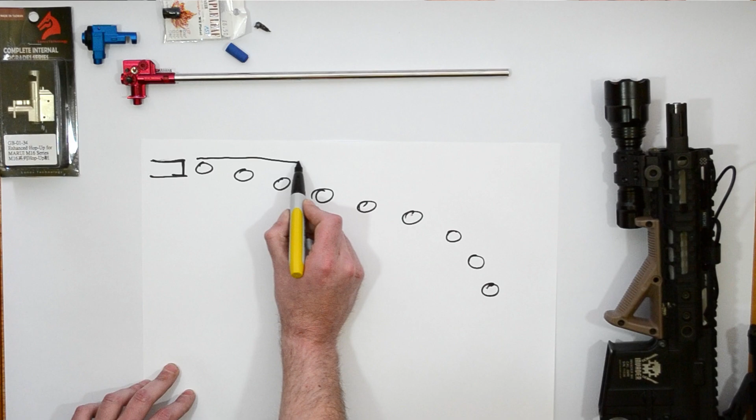If there was no hop-up, the BBs are just being propelled by air in this direction. What would happen is our BBs would come out, and then almost immediately they would start to dip, and dip, and dip - perhaps not as extreme as this, but as they go along they'd run out of momentum and fall to the ground. So you can imagine this would end up with a curve that starts to dip slowly, and then as it runs out of energy, down it comes.

Which isn't ideal, and more importantly, this distance here could be as little as 20 feet. Airsoft guns without a hop-up effect shoot very little distance at all.

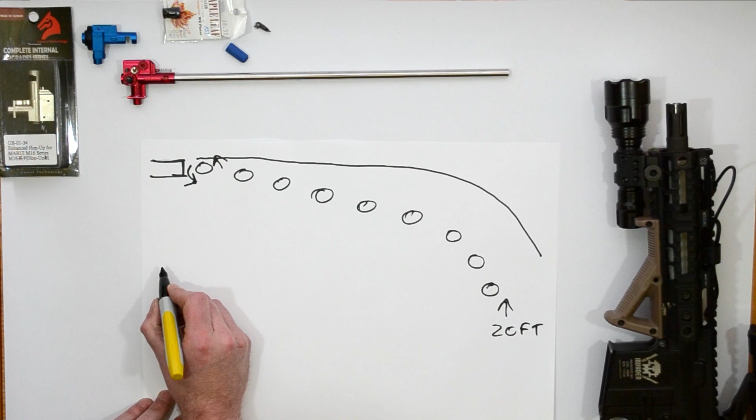So what a hop-up does is apply backspin to the BB as it's coming out of the barrel. So instead of coming naturally out of here, when they come out they've got momentum like this. This means that instead of just falling immediately, they're actually spinning against the force of gravity, so the trajectory ends up looking much more like this.

It looks similar, a bit straighter here, you'll notice. The main difference will be this will now be 75 feet or 100 feet. So they can make an enormous difference - they're hugely important to how far your gun is going to shoot, and because of this, adjusting them can make a massive difference.

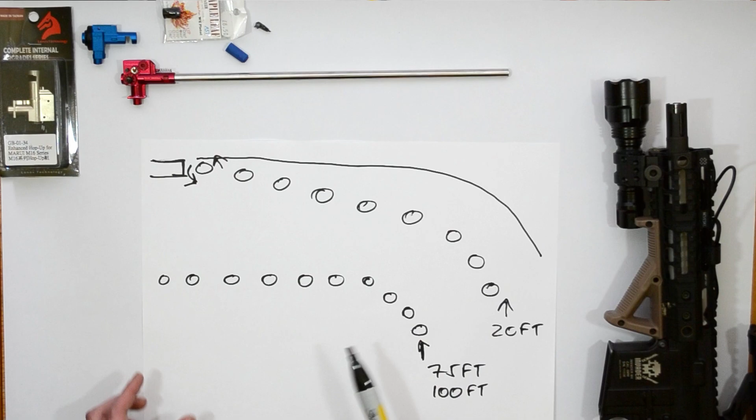So this is loosely what they're doing - they're applying the backspin. How do they go about doing that?

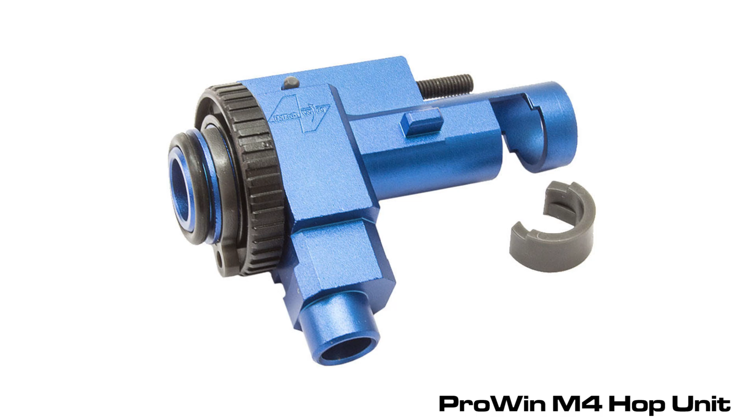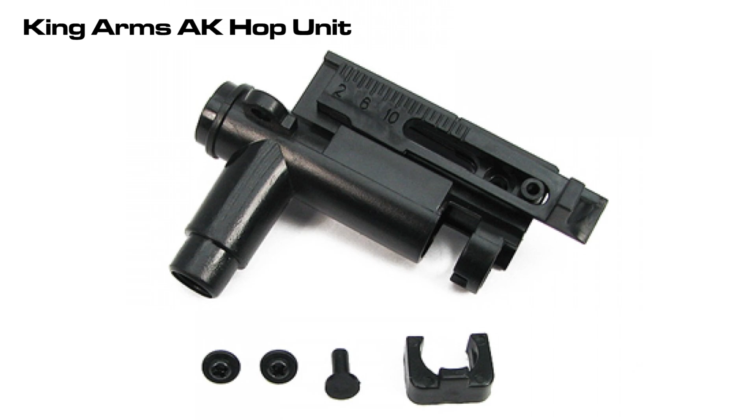I'm going to do this in a way that's hopefully fairly generic and applies to all guns, because there are different types of hop-up depending on which gearbox you've got. There are even some proprietary hop-ups that only exist in certain guns. But the main gist is they always have a way of adjusting them from the outside, unless you've got something super specialized like some of the sniper hop-ups.

So what I'm going to do quickly is a very, very bad drawing of a hop-up. We've got this bit here, which is the bottom, and this basically just leads to your magazine - so your mag is down this direction.

Then behind that, we've got this bit that follows out, and this is where your barrel and everything happens. I'm going to ignore this little bit up here, because it's basically just there to hold the mechanism - this is the bit that changes between guns. So picture this: there's a little bit that sticks out the back there, and it looks a little bit like that. This little overlap is because this is where your gearbox is.

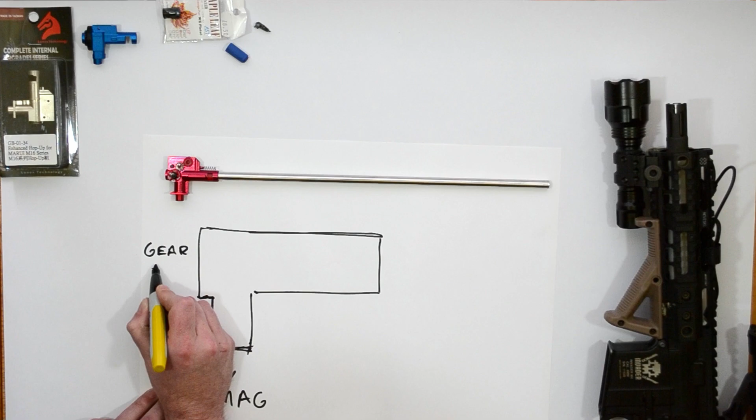So this is where all the air is coming from. The way the hop-up actually works is there is a little lever, and it attaches within this mechanism back here. I'm terrible at drawing this, I've tried many times, but there you go - a little lever attached back here, and on this lever is a sort of nubbin. They're actually called a Hop-Up Nub, and they sit just there.

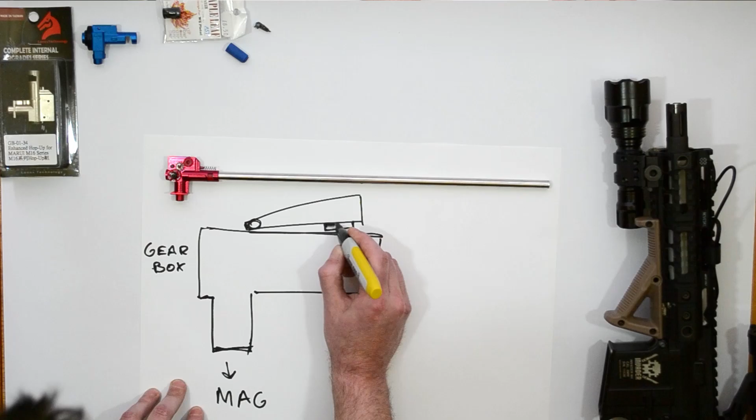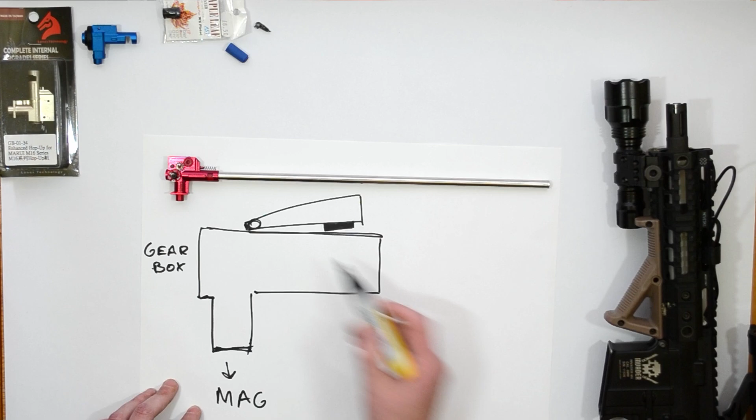What that's going to do is push - this is what you're adjusting - and that pushes down into this whole chamber. But because that couldn't just sit in the barrel, it would interfere with how things travel, there's one more really important component: one of these little rubber things, these little boots that sit around the barrel. You can imagine how that sits around the barrel, and what this does is handle all of the air seal within here.

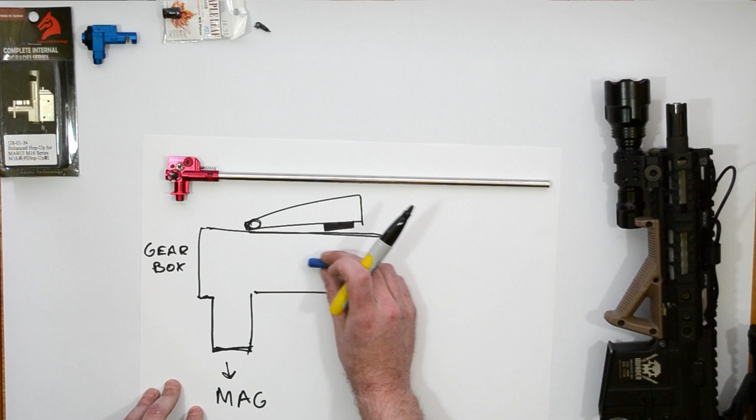So this is sitting here, so I'll try and draw that on in a way that doesn't look too terrible. We've got our boot that comes in here, and then about here it does this. There's a little knurling on the end, and what this is designed to do is hold the BB. So the BB comes up in here - we've got our BB sitting here, held against the lips of the hop rubber until something pushes it beyond.

But the other thing this hop rubber is doing is allowing, via a little window cut into the barrel - you can imagine there's a cutout for it within the barrel - is allow this to push in against the rubber and bulge it a little bit. So this rubber ends up with a little bulge at the top. And as the BB travels down past this bulge, you can imagine it causes friction. So we've got this BB travelling to about here, and you've got friction from our bulge pressing against the BB and causing this backspin.

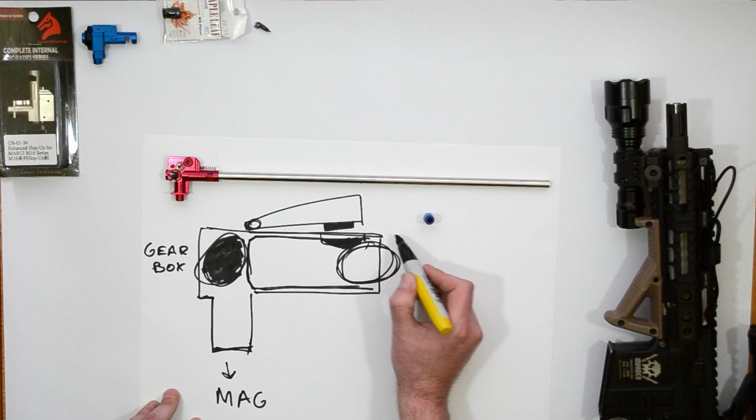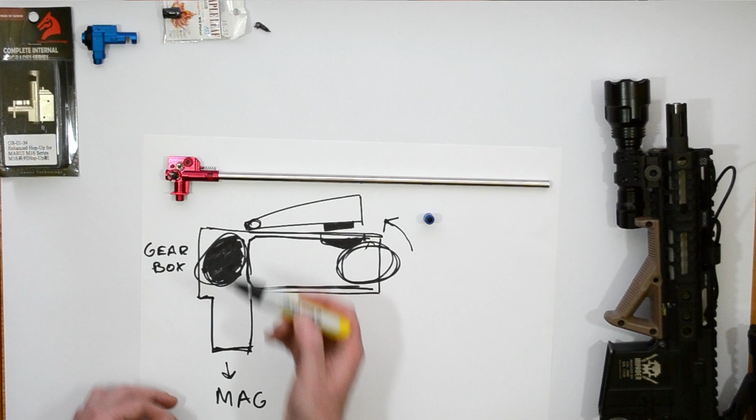So you get an idea hopefully how these components interact, and more importantly how there are areas in here that can be really important. Part of it is, of course, adjusting this lever. Depending on how this is adjusted - and on this one there's a little dial on the side, on this sort of style sometimes you have a wheel like this one, on other ones there's just a little slidey lever that sticks out the side of the gun. For example, AKs work like that.

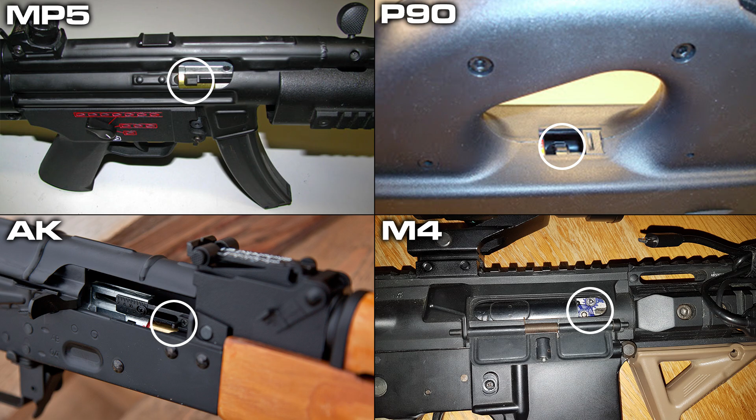And if I just quickly show you on my M4, this is not just here for candy. So for this one, for example, any M4, any V2 - this is a V2 gearbox - and almost all of these work identically. You will have either a catch button, normally this thing, or in mine it uses the bolt handle. Pull that back, and you can now see that's revealed that same little cog, and you can see how this could be sitting about there. The magazine feeds into the bottom of it.

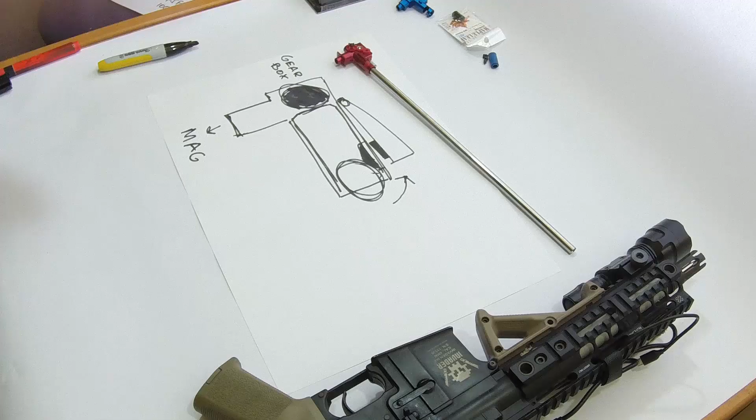If you're ever unsure about where to go to find this, just ask someone at the site - they will not mind, even if you're first time down there renting a gun. With hop-ups, the only way to damage a gun is to turn it up too much, so that this bulge comes too far down in here and starts basically causing too much pressure in the whole system. So be aware of turning it up too high, but to be honest you're never going to do that.

So let's get rid of this. We've seen a bit what's going on in the hop-ups, and this is pretty generic to all of them. So finally, what are we actually looking for from the hop-up? How does it affect our range? We've seen a bit how it affects our range, but what else is there to it? And how does it affect our accuracy?

So first up, you've got range. And you'd imagine that when you're setting your hop-up, you've set this thing up correctly, you've adjusted the dial until it's just right by looking at your shots, and at the end you'll get a trajectory that looks a bit like this.

Travels along, and then at the end, she dips down. Now this is fine, and this point here could be 75 feet. Good range. However, it's not necessarily the perfect way to set up a hop-up.

There's one other way you can do things that's more geared towards range, but if you learn to use it, it can be really good, which is to set up your trajectory more like this. So you have the BBs coming along, similar to this, flat.

This is where the momentum of the BB is perhaps the most powerful force. There's still loads of momentum coming along this way from the air from the gearbox, so it's keeping it level even though it's spinning backwards. It's going to continue along, and to this point here, just before we dipped, was 65 feet.

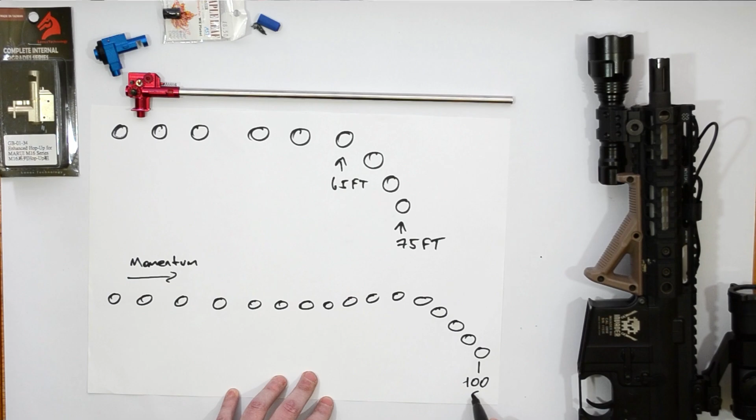So it can be really good to set up your hop-up like this. And the only way to do so is by looking. I've tried to get some footage so you can see kind of what this looks like from the shooter's perspective. But that's kind of what you're gunning for.

Now, how does it affect accuracy? Well, firstly, you've got this little rubber bit here, which is an air seal. If this is not very good - in fact, this one's out of the gun because it is terrible. This is the worst hop-up rubber I have ever encountered.

However, if the air seal between this and, say, let's get this one out, that is not very good, then obviously you're going to end up with leaking air, which is never great in guns. In these guns, you don't want to lose any air. You want it to stay where it is.

But more importantly, if these cogs move around and they aren't stable, they move between each shot, then instead of getting lots of shots like this, where at 100 feet here, we've got our dude, and you can reach him with every shot. If you were to aim for his chest like perhaps you should, you're going to hit him in the chest with every shot, as long as that's not moving.

But as soon as that moves, your next shot does this instead - up into the sky and then drops like a stone. And then your next shot does this.

So you can see how this needs to be quite tight and quite well done to actually make sure things are accurate too. But that's a subject for another video, because this was more about how it works and how it can benefit you adjusting your hop, and more importantly, quite how important this little block is in your gun. It's one of the most important parts of the whole gun. We're going to come back to that in another video where I can talk a bit in depth about how you can make your hop-up better.